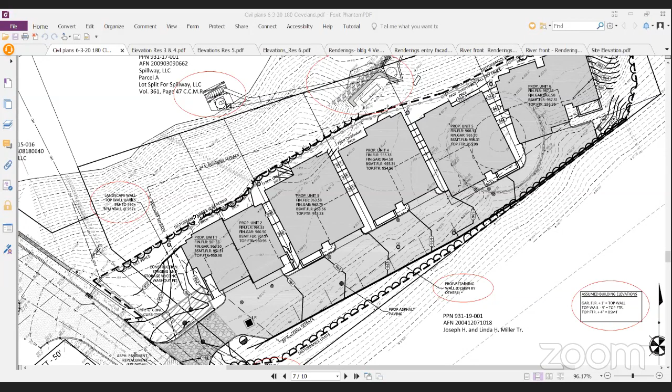Welcome everybody, good morning. Steve, I'll turn the floor over to you. This is for final review for 180 Cleveland Street.

The final review. I'm puzzled by that because we don't have a lot of information yet. Final review is when all the ducks are in order, and we're missing engineering, landscaping, final grading, and so forth, and the mystery brown structure that appeared at the last meeting. So I guess I'm puzzled why this is a final review.

Yeah, the applicant did ask for a final review, although their engineering is under review right now. It's not complete. They would wish to proceed with final ABR, and I told them we can submit it, but it's ultimately up to the ABR.

Well, I don't know, it's just the way, a vote type of thing. This is either you is or you ain't. Final is final. Well, I think maybe the relevant question would be, would there be anything we're not seeing that would have an impact on the architecture review board's opinion of the architecture of those houses?

And I guess it's probably what I'd be thinking about would be big changes to grading around the structures. As far as the structures themselves are concerned, certainly we can ask about certain details, but for the structures, it's a complete set. Harry says the grading's under review, and the site work, obviously the retaining walls and those elements, are so important.

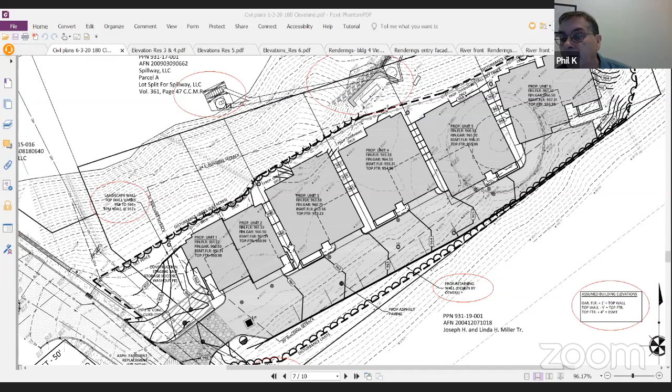It looks to me like the buildings, from the site plan that Harry has up here—the topography is dropping, I don't know, 6, 8, maybe 10 feet through the depth of the building. What happens when you get to the lower level of these buildings up against the steeper grade that runs to the river? Is that where the retaining wall is that we're talking about?

I can speak to the retaining wall a little bit. As far as the information on the retaining wall, we've had on the civil drawings that have been submitted—even with our preliminary applications—we've been showing top of wall and bottom of wall elevations as they work across the site, all the way back to our preliminary submittals.

We had an elevation, because it was asked for, of the retaining wall. We had that submitted along with our preliminary approvals. And yes, as part of this submittal, we also have information on the retaining wall included. So this is not in any way the first time we're seeing this. We know it's an important component, and it's been asked for from very early on, and we've made sure to include that.

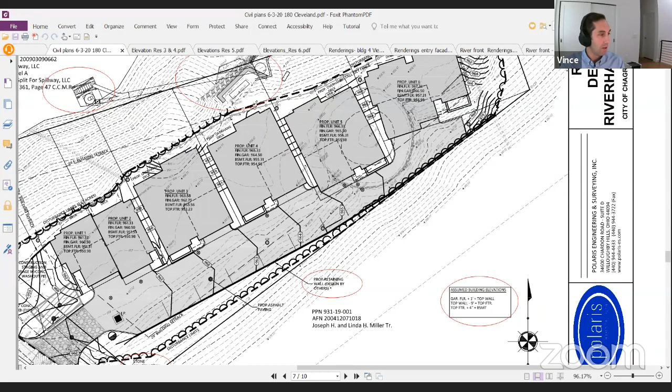To help clarify where the retaining wall is in the drawing that Harry has up, it's the heavier line towards the bottom of the sheet, starting over by Cleveland Street. You'll see a round circle with a line through it. If you move down from that... No, that's the property line. So if whoever's running the cursor could move up a little bit, towards where it says '20-foot building setback,' the bottom left-hand corner—there we go. So just up from that, you'll see a black heavy line. That's the retaining wall there.

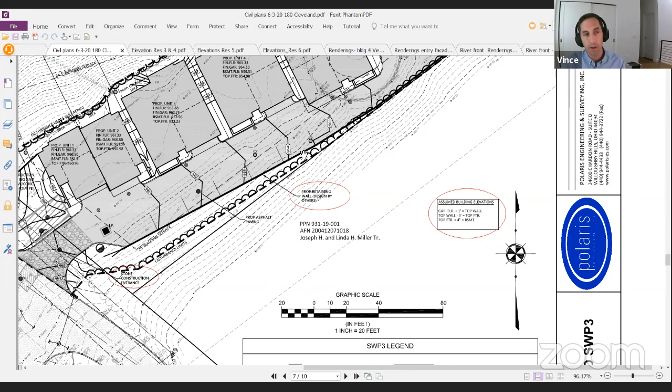So it's for this portion—it comes down, and then as we work our way back towards the property, it jogs a little bit and continues back. So this is retaining the hillside above this property. It is, it is. And the buildings themselves are designed in a way that...

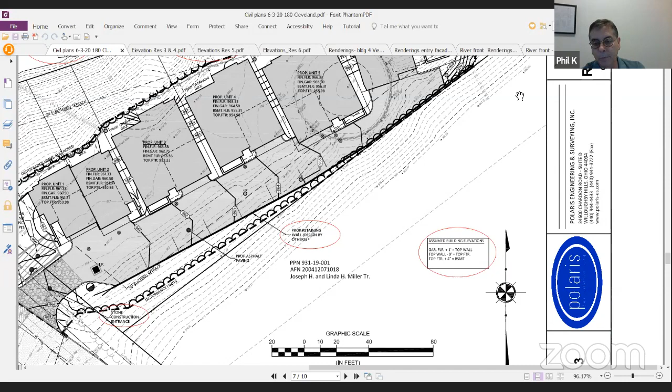...any load that the buildings provide will not add to any kind of stress on the hillside below the building. That's accurate, that's absolutely right. So the houses themselves are bearing on the rock beneath the hillside. So the buildings are not adding any weight to the toe of the slope.

Our geotechnical engineer has been working with Tim Lannon's office to make sure that everything he would want to see to satisfy the hillside permit in terms of borings is being done. We're actually doing some additional borings tomorrow to do a stability study through one section. We've agreed with his office what he wants to see for the hillside permit, so we have more borings being done tomorrow to satisfy that. But the houses themselves are not adding any weight to the slope.

So the retaining wall is just to bench back the area for our driveway, starting in the back corner of the property by where you see unit 6, which is at its tallest point there.

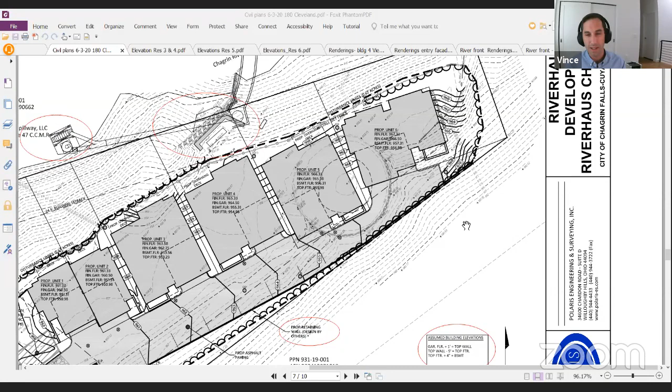And I think above grade, Mike, feel free to correct me if I'm wrong, I think we're showing maybe 6 feet of wall on that side roughly. Yeah, so at its far end, roughly 6 foot, and maybe 2 foot at the Cleveland Street end, sloping up.

We're going to be hiding most of what you see now, that current clarifier tank structure that's there, that's coming out. So the most you'll see of this wall from our side, from the driveway, is 6 foot from asphalt to top of wall, and then it tapers down as you work back towards Cleveland Street. We're not actually retaining that much of the hillside since the houses have basements under and we're bringing the grade up around them. It's not a real big cut into the hillside.

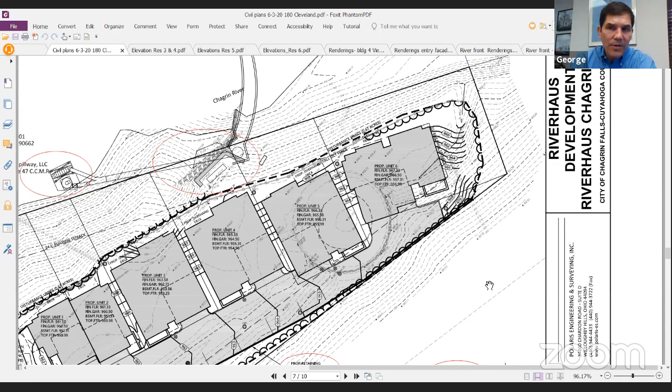Right. So as I look at this, I'm just helping explain this and help everyone understand it. The first couple houses, the floor levels jump up about 1.5 feet, and then between buildings 3, 4, 5, and 6, they step up 1 foot. So those lines on the driveway you see are 1 foot increments. The driveway rises across the 5 buildings about 6 feet, as you said, gradually sloping up. The buildings step up a little bit, and that probably helps keep the embankment above the driveway, that retaining wall, down to 6 feet at the top of the site, right?

Yeah George, thank you for that, that's exactly right. When this project was originally looked at, there was discussion that the houses would be much lower than where they're at, and this wall would be much larger. As the grading developed and we worked this out, we found what we consider to be a good balance between allowing some daylight in those basements and minimizing the amount of exposure on that retaining wall. It was really a balance between those two things to keep the retaining wall to a minimum.

And all the grading is finalized, so it's not like anything's really changing here. You've got some engineering calculations that are still being reviewed.

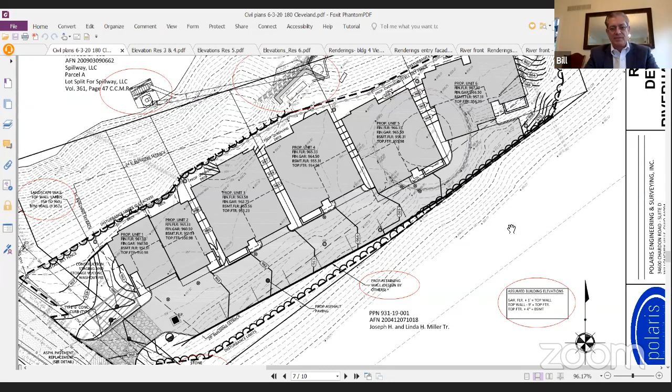As far as the draining and grading, our civil engineer has of course handled all of that, and we've had to be very careful with that to make sure we're not draining off down over the slope because of the 5-foot setback from the hillside and the requirement that we're not allowed to touch any of the vegetation. Beyond that, there's very little that we can do on the riverside over there. So we do involve landscape architects on our projects when we feel there's a need, and from our perspective, there's just very little area here to require that.

Now we'll work with, obviously there's going to be landscaping here, and we'll work with the homeowners and the contractors to do some sort of design build on that. But there's just very little landscaping on the site.

I can't flip to the page that has the elevation or the rendering. I don't remember seeing any retaining wall. Until last meeting, we had a glimpse of a little brown wall that wasn't concrete, way down at the end. And now it runs tapering almost to the first unit. What does that look like? Why haven't I seen it?

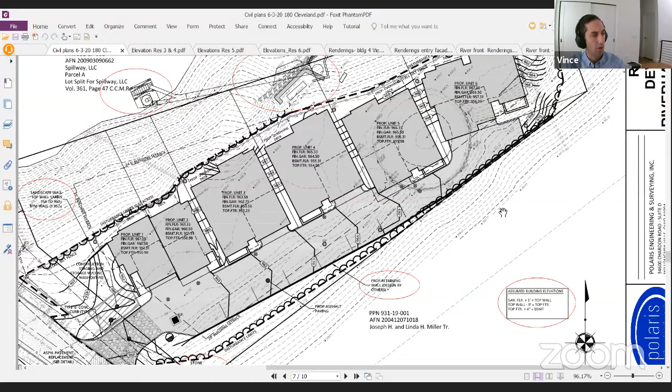I believe you're referring to what's circled in red right now in the upper left-hand corner. There's a concrete structure originally from the dam works that is being reflected in our renderings that goes down into the river. It's not part of our work. It's an existing structure, beyond that 5-foot setback we're not allowed to touch or do anything with. So we're just trying to represent that the best we can in the renderings.

But it's what's on this drawing. It's showing some mechanicals on top of it, which are no longer there. But there is a concrete pad that was part of the paper mill's operations that goes down into the river. That's still on site there. But once again, that's beyond our property line actually, and the area we're allowed to touch. And you can go look at it now, Steve. It's there. So it's not going to get any worse, and they're not allowed to make it any better.

Actually, I was looking for it, and it looked different than it looked in the rendering, so I wasn't thinking I was finding it. Now I know what you're talking about. Thank you. Sure. Yeah, we do our best with the renderings to represent what's on site, but landscaping or the current vegetation, for instance, is very hard -- obviously it's much taller than what's actually shown on our renderings.

If you're looking from the riverside, really the first floor and a half of these buildings are going to be obscured by the vegetation. Now we understand that's seasonal and will certainly change in the wintertime. But I would just remind everyone that what we're seeing in that rendering, as you come up Cleveland Street or from the river, is not really the perspective you're ever going to have on these, due to the amount of vegetation on the hillside.

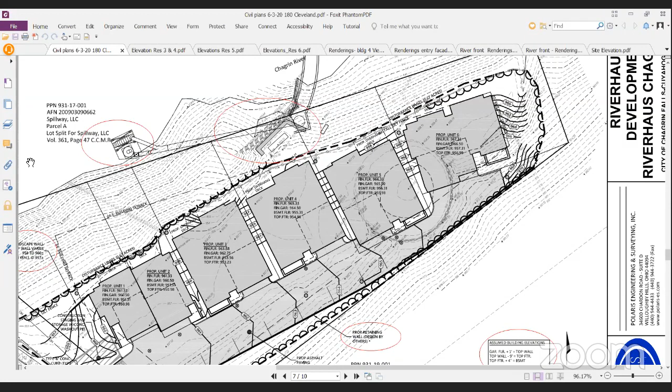I'm not sure what cultured stone -- where? On the one elevation, we'll go to it here in a minute. It's a structure out in the river by the dam, and it looks like it's got cultured stone attached to it. Okay, I mean, that stuff's not even on our property line. Yeah, that's even beyond. Don't show it on your drawings then.

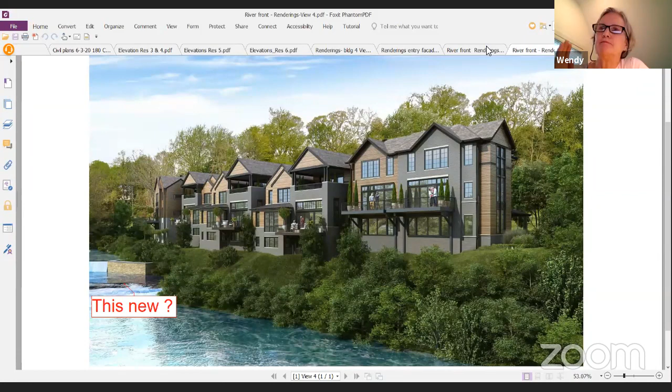Right, right. Carrie, I also don't know if it's possible to pull up a drawing that shows the entry to the property and shows that retaining wall Vince is referring to, continuing back across the property, down the driveway across the property. That's an important sight line from Cleveland Street. And if we're going to do a final approval, I want to make sure that we see that rendering, that sight line, before we do an approval. Yeah.

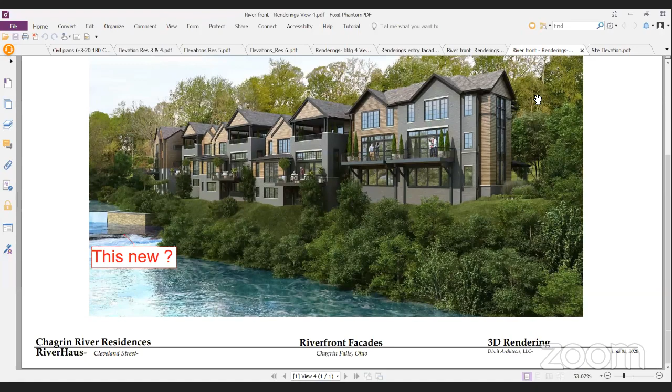We do have an elevation of the wall, if Carrie could bring that up. It's a separate page. Do you have anything beyond the site elevation there? I have everything you submitted to me, plus renderings.

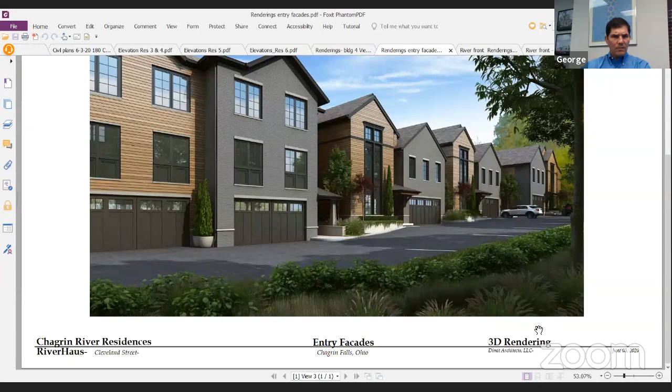Yeah, that angle, but with the retaining wall. Right, you just don't see it. It's not an accurate sight line because as you're coming up the street, across the bridge, up the street, your eye goes that direction, and I would just like to see that.

I understand that. We have an entry facade rendered from the backside, and from this perspective, you wouldn't see the wall, not only because it's at its shortest elevation there, but we're looking from the hillside, so it'd be obscured by the landscaping.

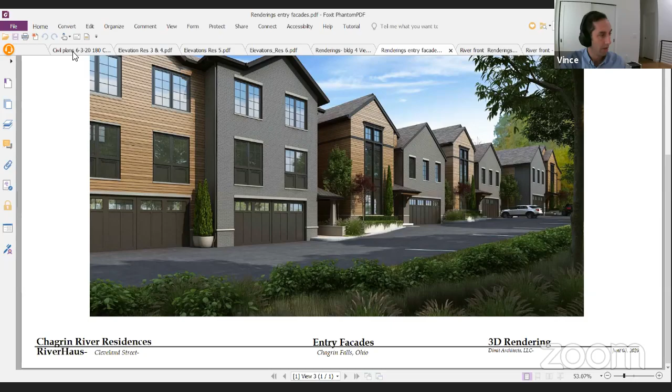That's why I think we need to see that too. I don't know if I have it open on my screen if someone wants to share mine, or I can — it's in our submittal, it's RH 1 through 6 wall elevation is the document, and it's the elevations at the retaining wall, so whether you want to open it or share it with me.

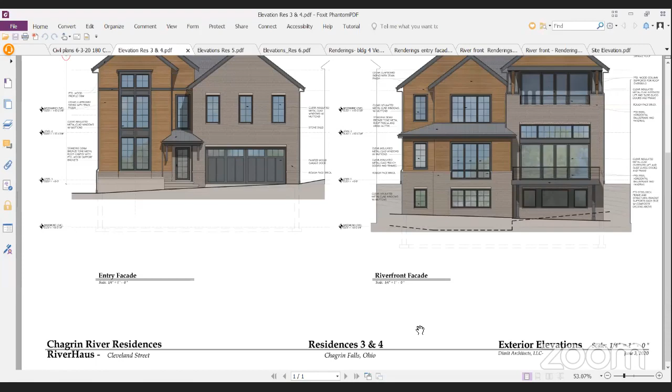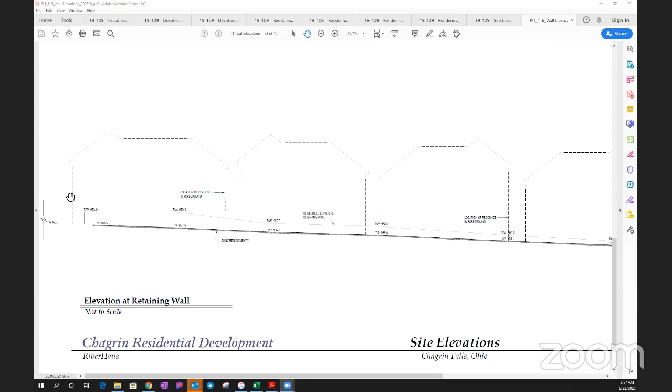Okay, so I'm going to zoom in here a little bit. This sheet was just to help understand the retaining wall elevations. So we can see here, we're looking at the outline of residence. You guys can see my cursor okay? Yes.

Okay, so this is the outline of residence 6, the farthest back from Cleveland Street, and you can see here we're giving top of wall elevations and top of pavement elevations. We can see how, if you're looking through the buildings, the wall drops down and continues down as it works back towards Cleveland Street, ending about halfway through the first building. This is where we're looking at 962 to 959, so 2 foot 6 inches at this point here, and that doesn't go all the way up to the street.

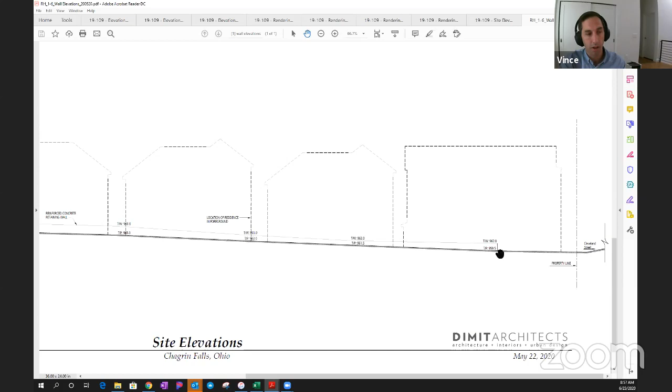Now I understand it's not a color rendering, but this is a very detailed elevation so you understand how much of this wall you're going to see. Could you zoom in a little and then scroll? Certainly. The diagonal lines seem to go away. There we go, that's better.

And while I'll kind of scroll through slowly here as we're talking — to your point, George, with the retaining wall, if we need to talk about putting some color in the concrete or a brick face or something like that on the wall, we can certainly talk through that. I'd like to ideally make sure we all understand where on the site the retaining wall is, how tall it is, and really where you're going to see it.

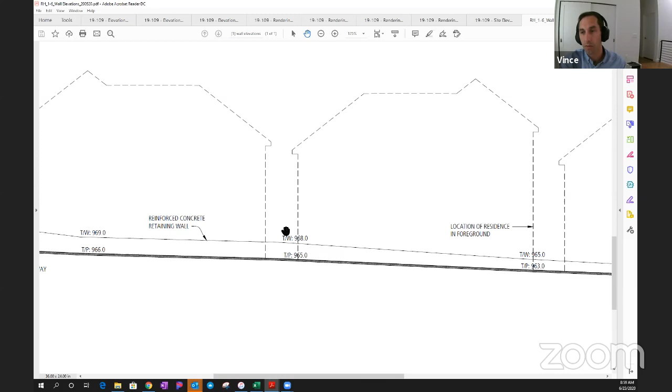So, from coming up Cleveland Street and from across the river, you're not going to see this wall whatsoever. You only have these little gaps between the buildings, and this will be fully covered by landscaping. There's very few areas from outside the site that you're going to have any kind of perspective on this wall. This is really something that the homeowners are going to be looking at.

As I come across here, you can see this is where it gets very short. So even if you're talking about driving up Cleveland Street, at this point it's only 2 feet tall, and you're coming at it from an angle coming uphill, and Cleveland Street's at a little higher elevation here. So, of course, I understand the aesthetics of the wall are important, but the reality is it's really something the residents are going to be seeing. It's not a public facing element. You're not going to have a perspective on it from outside the site.

It's a poured concrete wall, but if we wanted to talk about putting some color in the concrete or a brick form on it or something like that, that's something we could look at.

I'm not sure of the process here, where we're at. I'd certainly like to get into talking about the architecture. If the retaining wall is something that we need a little more information on, I don't know the process for approval on the architecture. If we need to submit additional information on the materiality of the retaining wall, we'd be happy to do that.

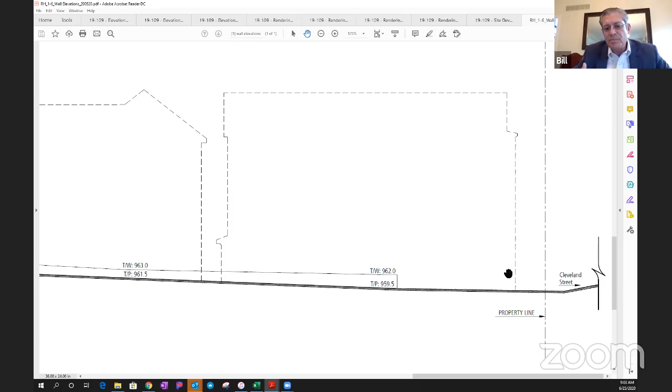It's not like piecemeal. I agree with Bill. I think we need to see the plan as a whole. We've been burned in the past when we've looked at things piecemeal. I'm thinking of condos on West Orange Street. Presenting things in pieces, I'm very hesitant about, but this is the first time I've seen this kind of presentation on the retaining wall. I would like to see more.

Ms. Nail, I apologize, but we're not submitting anything piecemeal. This is a pretty comprehensive submittal that covers everything that's been asked of us. And this is not the first time we've submitted this retaining wall drawing. I apologize if you haven't seen it, but we were asked for this prior to our preliminary review.

Harry has, as he said, been pointing out for a while that this retaining wall was something everyone needed to see. We made a point of including elevations for it on our civil drawings that were included at a preliminary stage. We've included this elevation prior. We don't see, from our perspective, that we're submitting anything piecemeal.

There'd be no further drawings developed for this unless we were asked to, to George's point, to look at the coloring of the wall or something like that. But this is a fairly comprehensive submittal for 6 single-family homes.

Mr. Childs, to your point, at the end of the wall it's 2 feet tall. The grading is shown on the grading plan. It's going to get feathered off at that point, and the grading will come up and wrap around that wall and cover the edge of the wall. I think we can all picture what the grading is going to do around that. It's on our grading plan, and we know how that would be graded back.

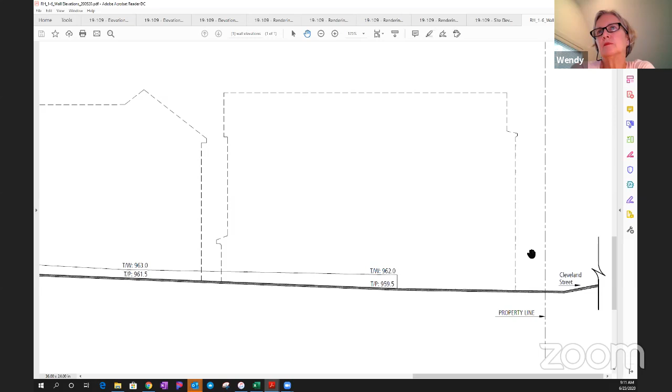Shall we move to the buildings potentially? Yes, do you want me to continue sharing some of the renderings? Yeah, go ahead Vince. Why don't you drive the drawings.

Okay, let me scroll through here and find a rendering to start our conversation off of. Here's one. I'm going to move this to a different screen. I have my notes here. We wanted to make sure that we very clearly went through the meeting minutes from last meeting and addressed every individual item that was asked of us at preliminary. If you would allow me, I can go through this list directly off of the meeting minutes based on all of your comments.

There was a comment, I think Mr. Childs noticed there was a conflict in the roof ridges not intersecting on the same plane. That was just something in the drawings getting resolved - the construction drawings hadn't been developed at that point, so these weren't meeting on the same point. I think Mr. Childs, you caught that at the last meeting. We addressed that as the construction drawing developed, and that's been fixed. Now this ridge intersects this ridge at the same elevation.

The front entry bracket sizes were discussed at the last meeting, and we have lengthened those. Let me see if you have a better perspective here. Please note, this is the rendering we looked at before - this is just a rendering. This is what you saw last time, and you can see the bracket terminates about here. Now on our actual construction drawings and elevations, we've brought them down even further to enlarge them per the comments from the last meeting. We've made them more substantial as requested.

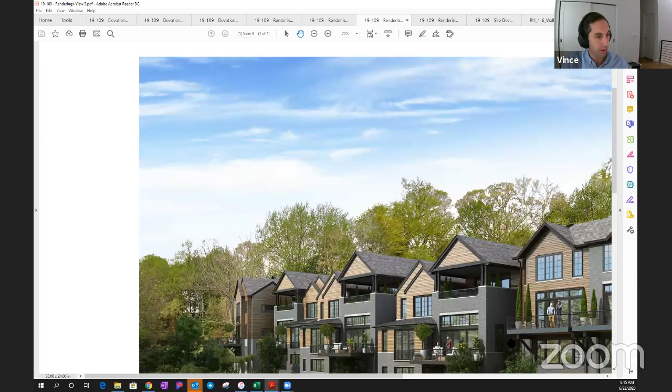There's also a question about a window - I'm going right off our meeting minutes, so bear with me. There was a question about this window here needing to be a little bit taller to align with the head height of the sliding door. That's been addressed here as well.

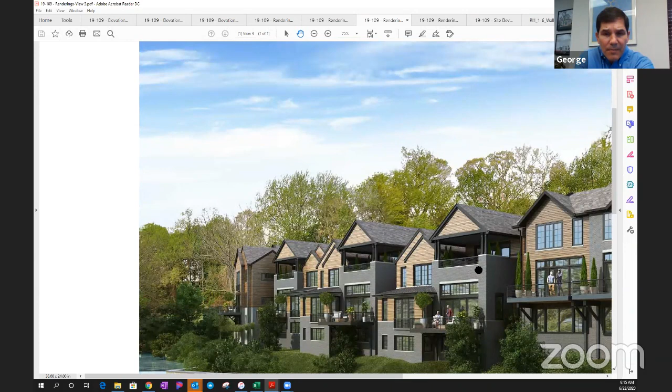Can I ask if that rendering shows the placement of the buildings accurately? I expect it does, but nothing moved - no buildings went back or forward. No, nothing with the footprint or setback of these buildings has changed since the first time we've been in front of you.

That was part of our zoning approval with Rob, and we have not changed anything. We've maintained our 5-foot setback, and the site plan has not changed. I only asked because they look tighter, in fact, in the plan drawings than they do in these elevations. I'm still fine with that window.

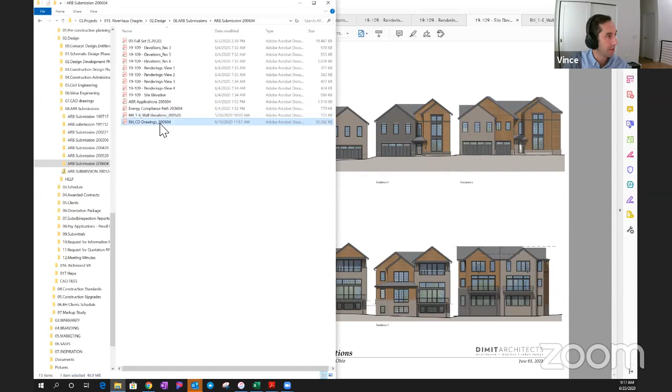Yeah, I'm happy to pull them up, I have the CDs here. I'm happy to open them, it's just a large set and might take me a minute to navigate. It's opening now, that's good.

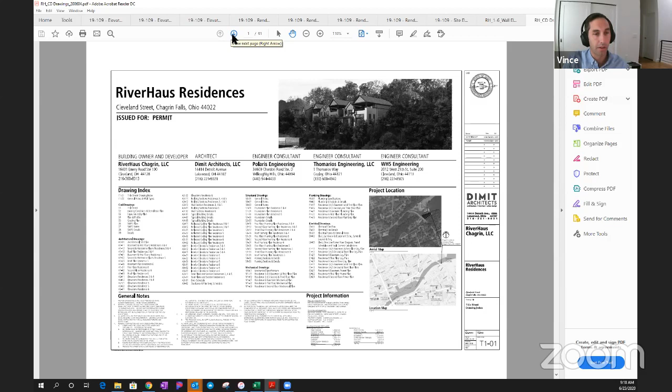There's a couple details that I wanted to take a look at. Certainly, they're opening now - it's going to be, okay, about 90 pages. So I can try to find whatever details you'd like to see on the construction set, just let me know and I'll open to it.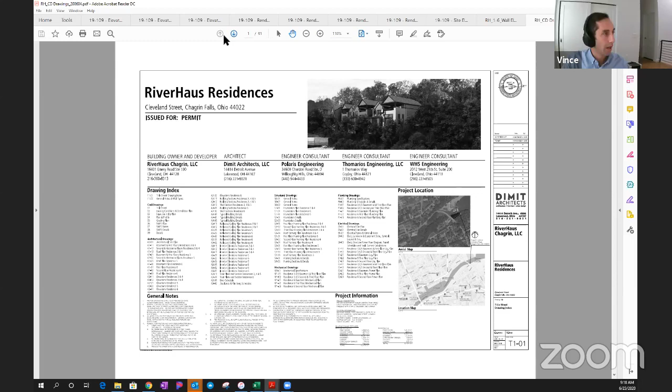Well, I'm not trying to jump there - I know you're trying to show the end elevation, so let's look at that. Okay, sure, let me find it. A2 something, right? Yeah. Here we go.

Our elevations - residence 6, that's the Cleveland Street side. Here we go, yep. So these windows were added since the last meeting. There's a fireplace here on this wall, so these will flank that fireplace on either side.

I think those are attractive and effective.

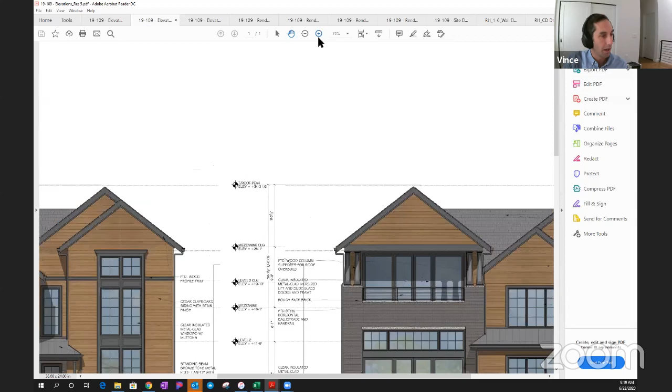So the list I just went through were our notes right off our last meeting minutes - I went back and watched the video from the last call, which was very helpful. We addressed, and I'm sorry, I skipped one: columns. There was discussion about these columns - we had one column, and it was requested we go to two columns at these corners, which we've done. I think that also shows up here, let me zoom in a bit. There are detailed dimensions on those columns within the drawings that you'd expect to see - A313 and I think A331.

Would you rather me go to the CDs? I think that's helpful, sure.

Okay, so there's a section through that porch. Let me zoom in. You're only seeing one column here because the other one's behind it. This section is one I was focusing on, and I was not critical of the column itself. I think that's successful—intuitively it's proportionate for a craftsman style column.

On the exterior side, you're showing a band that's an applied belly band that looks like it is a beam over the column. But in your sections, there's a discrepancy between this and a section for building 6. We're just seeing a flat ceiling there that runs out and touches that band.

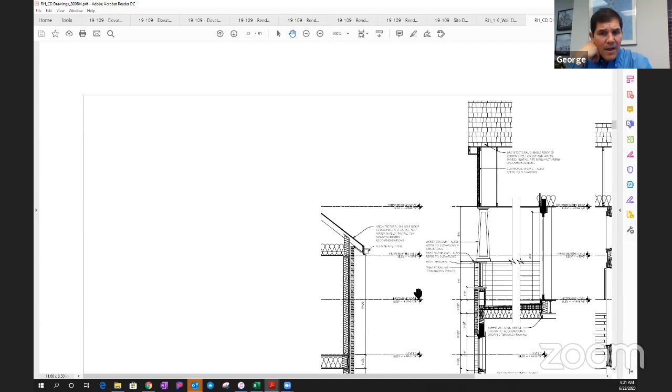I think it'd be important to actually raise the ceiling inside that space and have at least a 6, 7, or 8 inch height on the inside, so that you would actually have a beam over those columns. It's also hard to understand—I don't think I saw a description of the material of that ceiling. If you zoom in on the top of the column in another drawing, a section for building 6, you're actually showing something that's about 6 inches tall.

I think that whole ceiling will still work well with trusses, because in your other direction you're showing the truss as having a little vertical leg on the outside. I think you could pick that up and your trusses would still be a clean triangle, and you'd just have a beam expression which should relate to the width of the column, not just be a thin little thing.

Yeah, I certainly understand the note, and we can look at it, absolutely. Off the top of my head, you've kind of hit on this with the trusses. I know that truss line is carrying all the way out from inside the building, so if we have a raised heel possibly inside the building, there's something we can do with the heel height to achieve what you're asking.

But my only concern, and I'd ask for your opinion on this too, is obviously we have a guardrail height we have to meet here, and we only have 5 foot clear. My concern would be if we were to add a beam to this and drop this down any more. No, I mean raising the ceiling. Exactly, I think that's right.

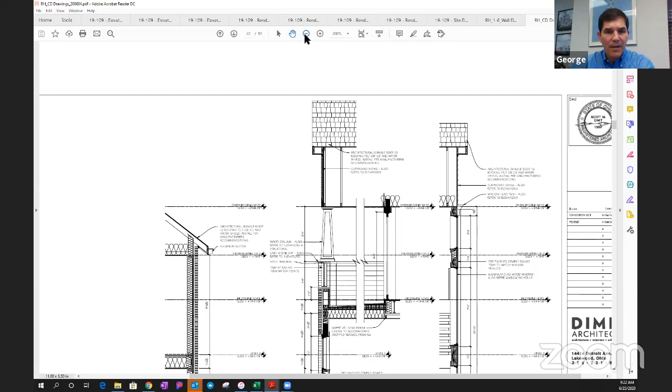You don't change the column height. Basically, you just—and you have another sheet further on, a section relating to building 6—it probably didn't get caught up, but I don't necessarily want to jump to that. But okay, you actually show that ceiling either with the column shorter or the ceiling higher than 8'6".

I think if you pop that bearing height up just for that area and use actual beams along the side and the front of that, you'll ultimately be more satisfied with the way it details out, and I think it will look more architecturally correct from the view from the river and for the people on the porch.

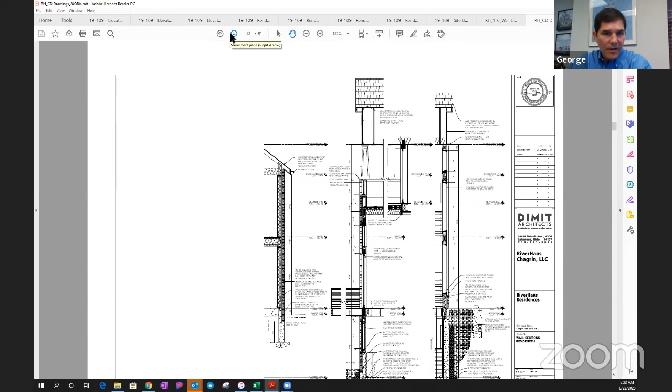I wanted to go into one other detail which I think is really important, and it doesn't seem consistent between the renderings, so I'm kind of ignoring the renderings on this. In this section, to the left of the one we were just looking at, we have a sloping soffit, which I believe is typical throughout the project. So the underside of your soffit slopes up to the brick, and it's not a little flat soffit at the eave—it's kind of a typical eave detail here.

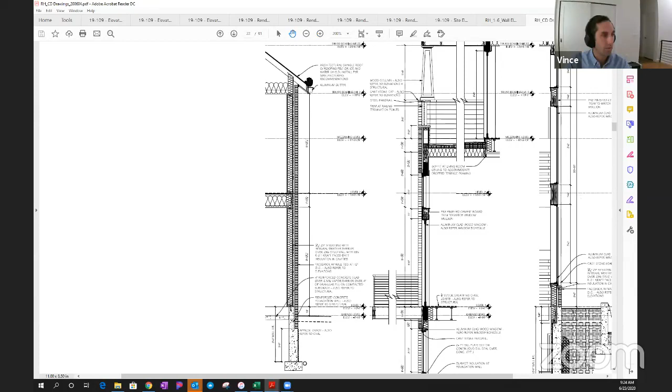Talking right here, yeah—let me zoom in a little bit more for you. That would be, for me, kind of an important preferred detail, because it leads to a clean eave line as it projects out, looks like this. It doesn't kind of pork chop at the end back to the building.

I think you've got a kind of a mix of what happens on the model, and I understand that—somebody's modeling it early on, and they're trying to figure out how to model it.

But I think that detail also allows for a beam expression on the side, and we're cutting through the front of that where the column is. As you run back from the column to the building, that gives you a face above the face of column running up to that sloping soffit. So this is your preference, what's shown here, but just be consistent with it.

Yeah, carry that through everywhere except maybe those little porch roofs. That's a good comment. I can't speak to every detail, but like you pointed out, if it's just a legacy item in the renderings and this is the intent throughout the building, we'll confirm that. And then you're speaking to the soffit, the underside of the eave, the soffit material, and the ceiling material on the porches.

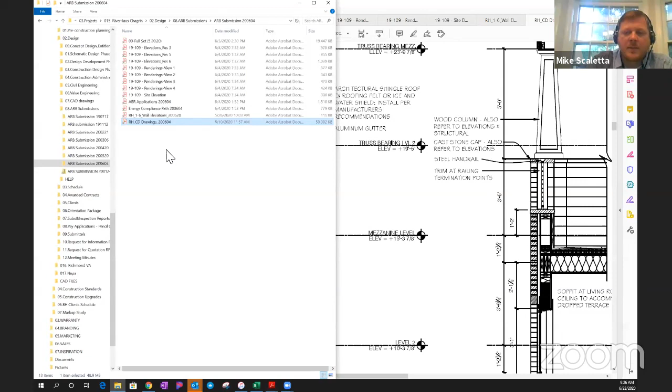Mike, do they have the PDF you created? We wanted to bring material samples over, but due to the virtual nature here, we prepared a PDF with manufacturers. We did do a material presentation, but I don't think we got as detailed as the soffit and porch ceiling, George, I'll be honest with you. So I may have to come back with that information. Mike, was that sent separately? Yeah, that was sent separately to Harry. Let me try to find it real quick and email it. We did do a material presentation that speaks to all the major components.

One of your eave sections shows clear cedar soffit board to match cladding. Yeah, that'd be great, if it's wood. I can tell you we're not using any vinyl products anywhere on the project, that I can confirm. And the one that would be a shame would be aluminum. So if you've got clear cedar soffits, that's exactly what I'd hope for. Or what about a composite alternate - not cedar, but something like KW - the material proposal actually shows a KWP composite cedar lap siding board, not natural cedar, and they have a soffit product that matches it.

We're looking for something a little lower maintenance for our homeowners than the work that comes along with keeping up clear cedar, and what that can look like if it's not well done. I'll open it in just one second when it comes through.

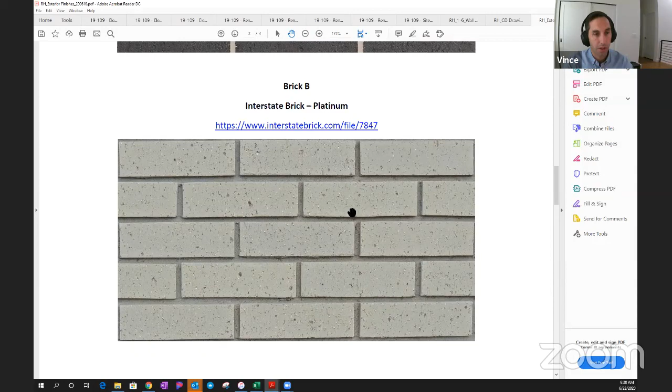We've got information that there's 2 tones of brick. This is the darker one, and this is the lighter one. There was a comment early on that there was a very white looking brick - this is not that. This is a gray, it's called platinum. We've got the file here. Sometimes the colors don't render out perfectly on the screen, but this is a gray brick.

Were you going to do that contrasting mortar, or is your mortar going to be more monolithic? That's a good question. I'd have to check with the architects on that. I think the intent would be for it to look more monolithic - this might be the only stock image we had, but if we look at our renderings, they reflect a more monolithic look on the brick. As far as what we could find off their website, this is how it was shown. They ask you to focus on the brick.

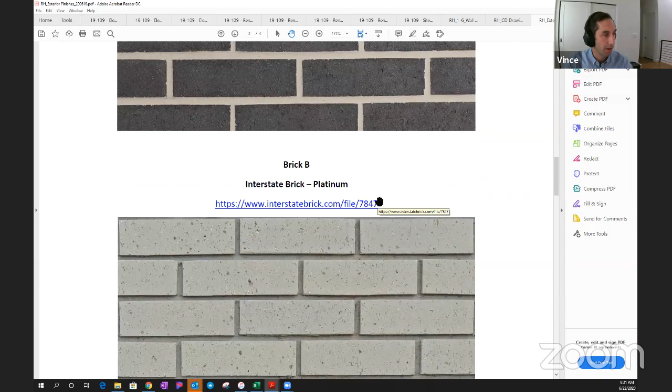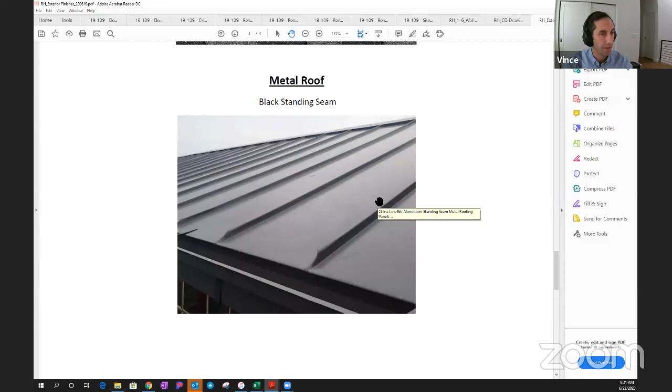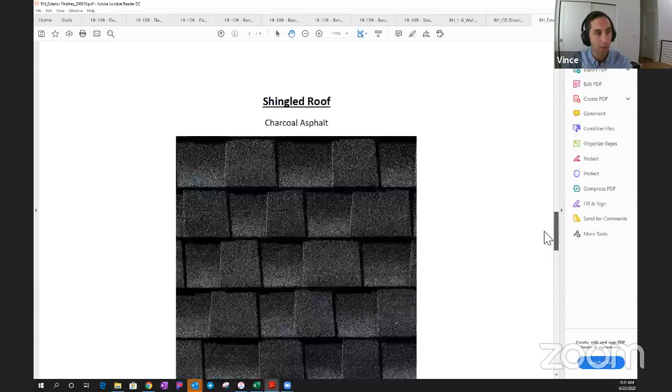Dimensional asphalt roof, where we have roof, we've got standing seam metal on those few areas. And this is actually one of our past projects, but this is a Pella window with the grids and everything, so this is what we refer back to if we start talking about materials at all. We do have physical samples for all these things, but due to the nature of these meetings, there wasn't a way to present that, so we put this together as an alternate.

What is the glass tint? We've had some issues lately in other projects with houses appearing to have dark glass. Yep, I certainly understand that. We're not adding any tint to the glass. They will have the low E coating from the manufacturer on it to help with UV transmittance into the house, but there is no additional tint beyond just the standard low E coating.

Is it a 272 or is it a 366? George, I don't know that off the top of my head, I can circle back to you. Mike, while we're talking, you might even be able to open - we have a proposal from Pella on that, if it's called out there I might be able to get you that information shortly. That's a follow-up item. 366 looks darker, 272 looks very familiar and is basically a typical low E.

I know Pella has 2 versions. They have something called their Sun Defense, which is a more aggressive low E coating, and then their standard. We have not requested that Sun Defense, it's the standard. So we'll try to pull it up while we're talking here.

Is there any other screens or drawings I can switch to besides the siding right now for anybody? This sample I'm looking at, is that one sample, because there's actually several different textures I'm looking at - is it just a mixture of textures? That's one sample to try to represent the variety you would see within this product. So there are 4 samples in front of me then? Nope, that's one, that's one product - you're just seeing some different grain variation across it. So when we install this on the buildings, you'll see a variety of grain texture just like this.

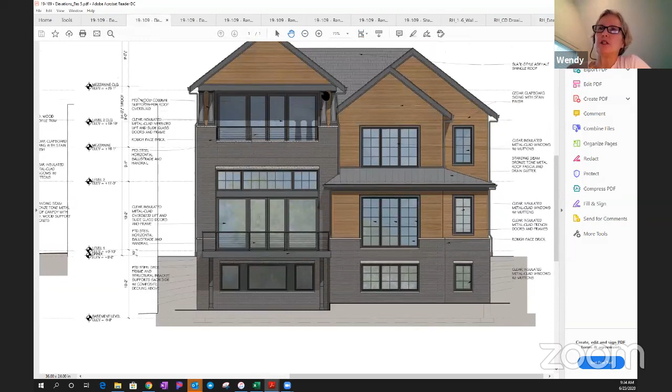Does the board want to go back to the elevations? Just so I'm clear, are we approving the first 2 units today or just the other 4? The other 4, Wendy.

I'm sorry, run that by me again. I thought we discussed approving the whole project, period. Yeah, that's the reference I was making earlier to the piecemeal approval of the presentation. But at a previous meeting, I think we agreed to preliminary approval of the other 4 units, and that the beginning 2 units could be presented at a later date for preliminary. I'm not sure where we were going on that for final. It was a holdback attached to that, as I recall.

Our intent is only to present residences 3 through 6. We're fully aware that we'll be bringing residences 1 and 2 back through as a complete submittal, both for preliminary and final, as a completely separate submittal. So we're not asking for any approvals related to the first 2 units today. We're just looking to discuss 3 through 6, and that's all that's part of this application. Now, of course, we have the one rendering that shows everything, and I still think it was important to try to present the site, but this submittal is only for 3 through 6.

It's important to me that you come back through with units 1 and 2 that now conform to the height restrictions, so we can see that the massing of them is... I considered it more successful, and I think the comments were primarily about the windows. I think we can talk about the same window issues here in buildings 3 through 6, but I would have been concerned about approving 3 through 6 if 1 and 2 hadn't gotten in terms of massing where they needed to be.

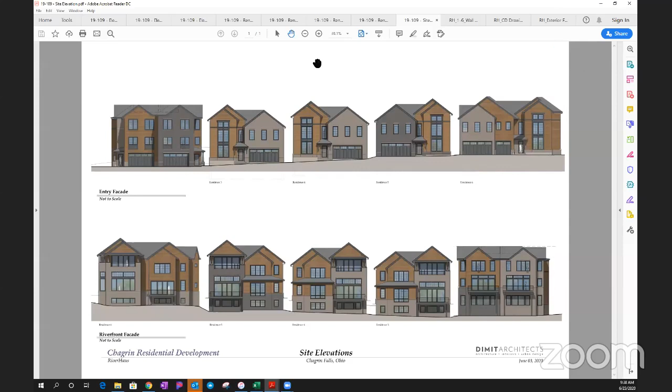So I see one significant change has been the lower level basement windows below the decks, where they've become smaller. I'm just looking for a little more consistency in the width of the separation of those windows. I've seen one triple that looked like it was mulled together as a group, and then there was one with a mull that was not too wide.

And then I think like these, which I'm looking at the bottom of the bottom group of elevations, middle three buildings, right? The windows underneath the deck, I guess I'd like grids in the two side ones, but then they're quite separated. Or to me, that's not really... it's not where the cursor is, it's to the left. Yeah, I'm sorry, I didn't move it, but I know what we're talking about here. Right, yeah, there.

So do you like the punched openings better that way than the one next to it on the left, George? I think so, and I'm interested in the comments of the board. I mean, I think those side openings should have grids, at least, possibly all three. I'm curious what the rest of the board thinks about that. But I think if you let the middle window vary, I know you have varying widths you're dealing with. You let the middle window vary and keep a consistent width between the windows. Obviously, the side windows are going to pick up the same proportion as many of the punched windows.

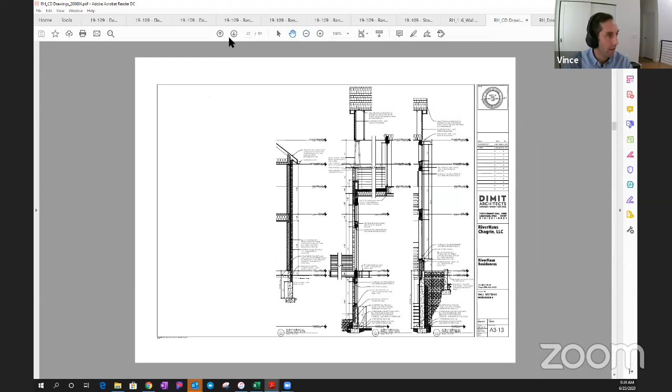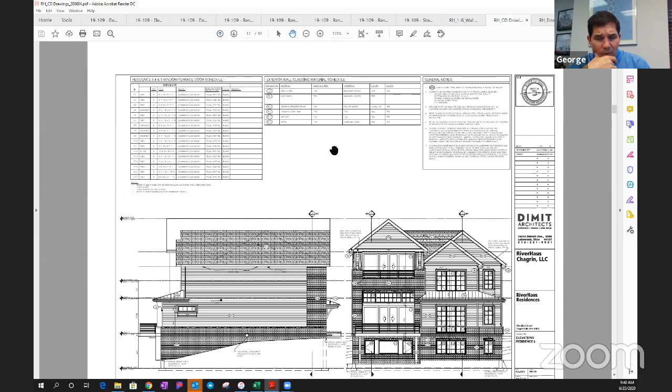Yeah, those are the two that I thought were residence 6, and different. So we're talking down here. I just want to make sure they were consistent between the color. So those ones, I would have an issue with those not being brick.

I think that's wide enough to be brick. So I think you either have brick coming between the windows, which is more like what you had in the rendering. So brick between the windows, I would consider acceptable.

Or if you go to the intermediate, so you've got a 6-inch, 7-inch wide mull between, and it's detailed with the window trim, that could be okay too, but I think they should be the same everywhere, building 6, building 4, 5, 3, 4. Certainly.

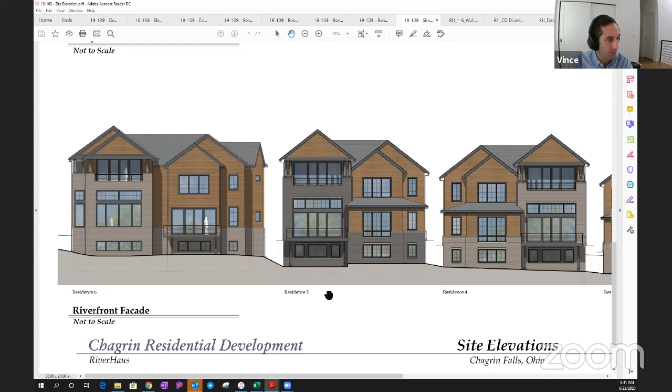So just to be clear on the comments - the arrangement of these windows is okay. We're talking about material between them and grids, or just the flanking windows? Right, and the width of the wall between them should be consistent. If you go down to 5 or 6 inches and it's just a mullion, then...

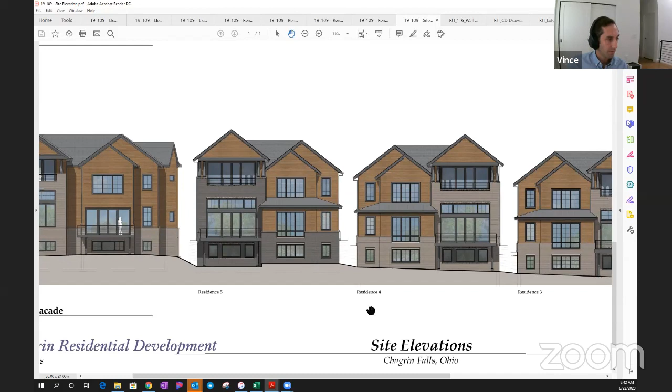I think the takeaway here is organizational composition of the subentity of the overall composition. What that means is if you look to the right, you have organization with the mullions and the windows, although that's matchy-match. To the left, if you just organize, try it with a sketch - show how the organization of the mullions, like starting with the transom, if that's A, the other two ends are B, do that in the middle section and continue on down. It'll feel better and look better overall.

Okay, I just want to make sure I'm understanding. I think we're pretty clear on the request here. Are we moving up now into these windows with that? Is there something you'd like to see here as well, or are you happy with this?

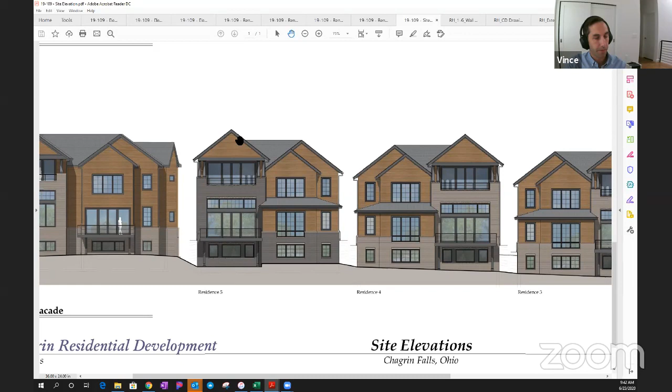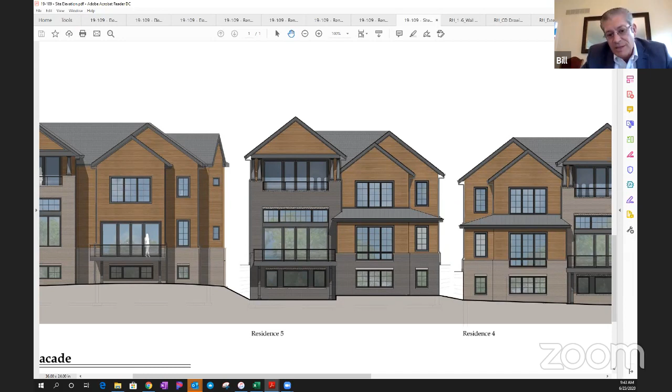From my perspective, on the middle section, if you have a transom that has the muntins in it and you have the two smaller transoms on each side, those mullions from an organizational standpoint should line up down below. They look like they miss, and from a visual standpoint, it doesn't really feel right. If you line those up, it'll feel a lot better. I don't know if you can do that from a function standpoint, but to the right - you see there's organizational composition, it'd be the same concept there too.

Okay, yeah, I understand now. We can absolutely look at it. We're not in any way opposed to it, if within the window manufacturer that's actually possible. We certainly understand the comment, and if Pella can make it work - we're currently looking at Pella and Marvin, but they're both comparable products in the lines we're looking at. If they can make it work, then yeah, we can certainly look at it. That's a pair of sliders there, so we just have to see if they can make that happen.

A pair of sliders where? These are sliding - this middle section are sliding doors here. Oh okay, same thing up here. By pair, you mean over the top of each other? A pair, I mean two active sliders - this is a sliding panel and this is a sliding panel that meet in the middle, so we can have a larger clear area for the homeowners to open up to the deck. They slide out over the fixed windows to the left and right. Yeah, that's right.

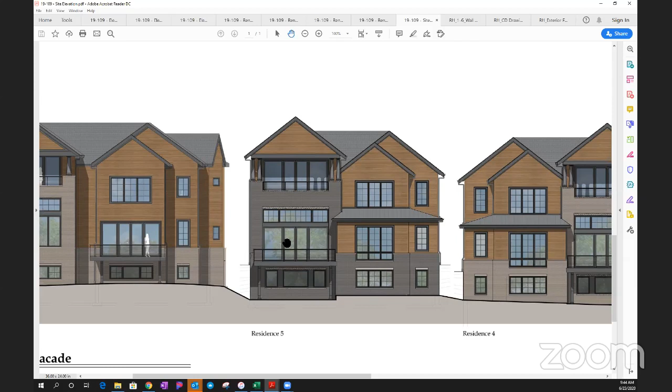Yeah, it looks like they could get bigger. From Bill's standpoint, his comment - can you make the transom lights align? Is that what you're saying, Bill? Or make the doors align? Make the doors align. Yeah, we certainly have no objection whatsoever to that if it works, as long as the window manufacturer says it's doable. We get it, I think it's a good comment - it's just a question of functionality within the limits of the manufacturer.

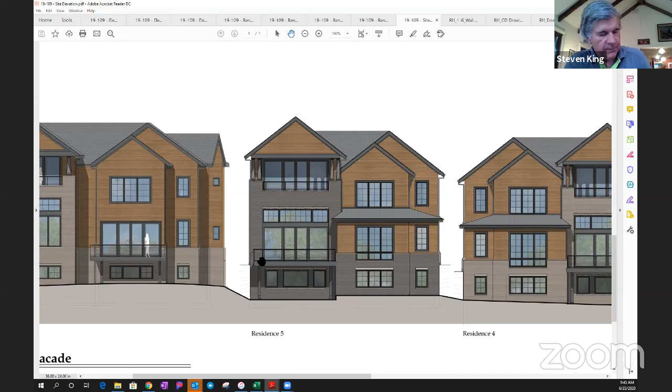Can you point out in a rendering the building that will receive the gray brick we looked at earlier. On the screen we're looking at, this would be the dark brick, the charcoal, and this would be flanked on either side by the gray. I'm looking for the rendering. Got it, the other side.

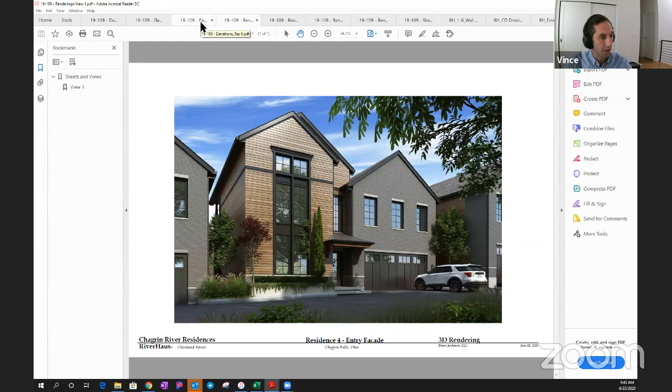Let me see if I can... In the renderings, the coloring all looks similar because they are just a light gray and a dark gray, so I'm trying to find the best way to present that. Let me back off here for a second and get my bearings. Sorry, I've got a lot of stuff open here.

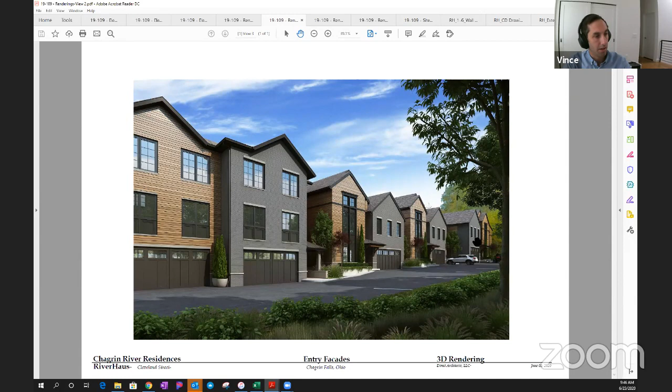Well, I appreciate your help. Okay, so I can... all right, looking, I'll go back to the rendering. I know you want to see it. So just so I remember, we've got dark, light, dark, light. So if we go back to here, dark. This would be the dark brick, light, and then dark as we work our way back.

Does that help? Yes, the other side, the riverside. Sure, yes sir. So again, these two would be light here, dark gray down here.

And then units 1 and 2 would be one light gray color, or would you vary those on 1 and 2? You know, I don't... I mean, it's shown here. I don't want to tell you the wrong thing on 1 and 2 since they're still in the early stages. Okay.

I like the muted look. Yeah, we know that originally we had showed you quite a bit of contrast in the brick, some dark and some really light, and that certainly wasn't well received. We understood it, so we still have two bricks, but they're not too far apart in color, so it's not as stark of a difference as you transition between the different units.

Mortar is about 20% of the surface of a wall, so the monolithic look will be important, and it'd be nice not to have it any lighter. Okay.

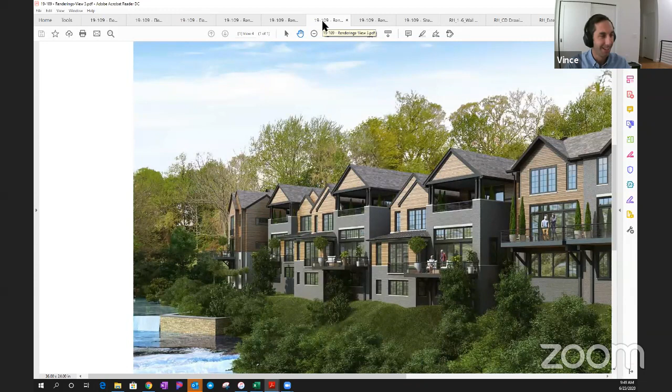What's your thought? So for instance, in this picture— oh sorry, George, I'll get back to it. There we go. So for instance, in this picture, you wouldn't have all that glass together down below the balcony to the very right there underneath it. It's pulling down and pulling in a little bit and separating. I think that's the significant change.

I saw, what's your thought, Steve? I know, Wendy, I know you... isn't that unit one? Aren't those units 1 and 2? Yeah, that's 1 and 2 over here. Probably hasn't been changed. I'm just trying to say that's kind of was the change that was made. Right, and I think that's what we're probably waiting for your feedback on.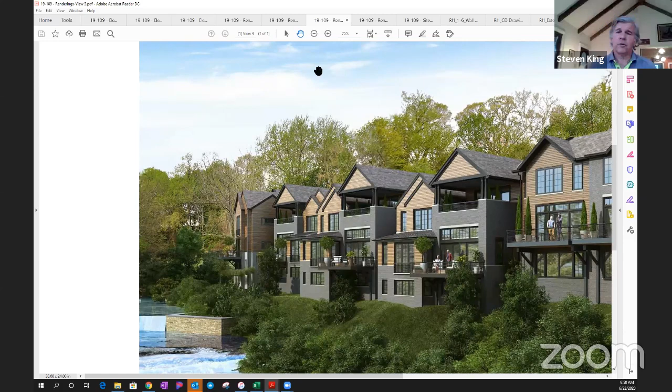1 and 2 are the main concerns with glass because the elevation is higher and more exposed and more in line with the road. You come down that road, you drive at the buildings and then by the buildings.

It's a very dark surround with the woods and so forth from this side for sure, a lot of glass. I've been preaching that since day number one. In some cases, I'm not sure why it's necessary. You want to sell these, you want the view, that's what's going to sell these. I understand that. But there's no view from the staircase, so that's not necessary. That's for another day.

In terms of, I wish I could see the contrast of the new gray brick versus this gray brick, because you don't want them to look like a row house, all the same. Well, they're different in many ways, so I don't think it's going to look like a row house, all the same. So variations are fine.

Why it needs to be lighter, I'm not sure, and I'm having trouble understanding what light brick is going to look like in those two units. This rendering may represent more the lighter color than the darker, or it might be even in the middle. I'm not sure about that. Is there a way to know that?

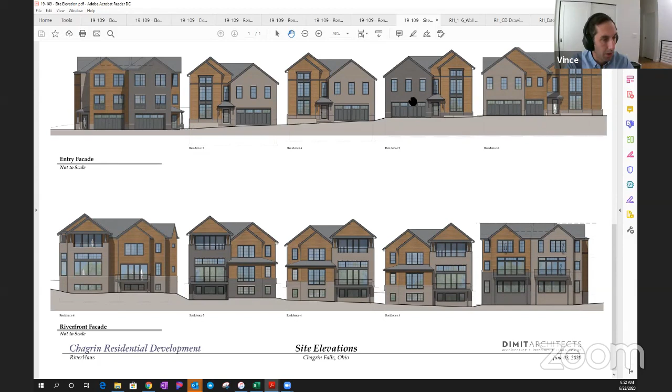Okay, you're saying that color is most like what? Well, I'm just saying like this image that I have open would probably be the best representation to help show some variation between them. The renderings aren't doing a great job of showing the color variation between the two bricks, but this color 2D elevation does. I guess was my comment.

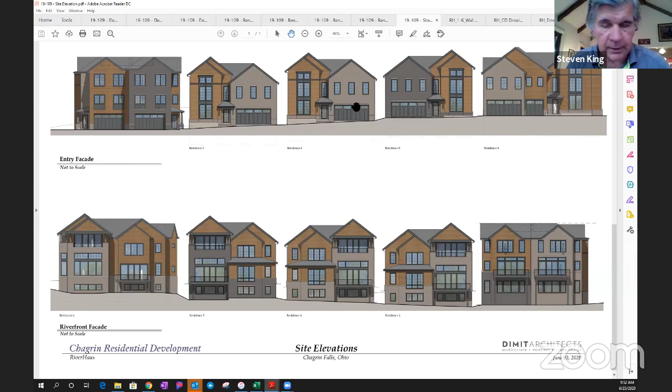I know in the past, could we project, see your lighter? Could we see your current gray color sample slide that you had a while back, please? Here we go. Zoom out a little bit so you can get them both on one screen.

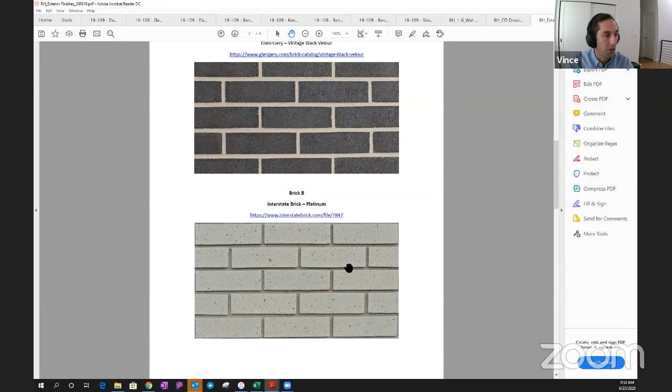We walked every row with Brian Williams over there of all their samples from every manufacturer. They either just looked so close there was almost no point in doing it, it'd be such a subtle difference. In past projects, we've done some that are real close, and when you step back, you can't even see the difference, but the architects know that there's a difference. We've had jobs where we've done the same color in a wire cut versus a smooth, thinking that subtle of a detail would add some contrast, and it just bled together.

We did, I mean, I don't want to tell you we'll go back and look at it and not have it, because we actually did put a lot of effort into the grays here.

Which joint are you going to use, the top one or the bottom one? Joint wise, it would be the top one, not raked back. That's part of what makes these look not quite the same, not quite as compatible. You've got the raked joints with a matching mortar, and then you've got the tool joint but flush with such a contrasting mortar.

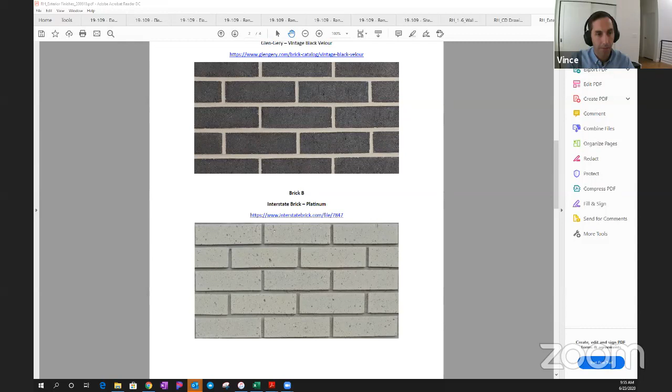That's, and sorry, these are just stock images, the boards wouldn't show it that way. These are just the best images we could find online. We might have some more current renderings for you to look at that show the brick a little better, if you'd like to see that, I can probably find it in a second here.

It's hard in the renderings though to actually portray what George is talking about, the level of contrast. This is a really high level of contrast. And I might throw out the suggestion of not doing the contrast, of just sticking with one color throughout.

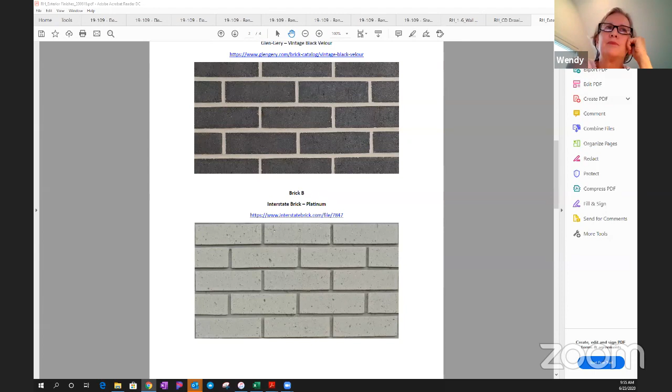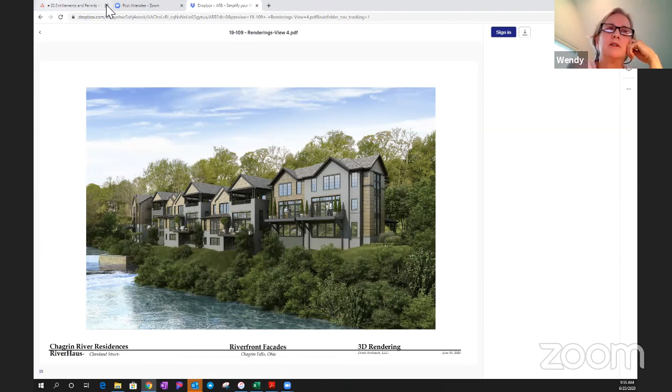Because that platinum is going to pop, especially right next to that very dark, they're calling it almost a vintage black brick, that dark charcoal gray brick. That is going to make it pop even more. This rendering we're looking at right now might be more closer to the platinum.

This is new, I just opened this. So this is a view we've seen a minute ago, but that helps to see. So once again, we're not really looking over here, but we do have a light and a dark, and then this is the platinum and this is the dark down here.

So that is the brick you're proposing? Yeah, this is the most current. Looks like it has a matching mortar. Yeah. You're going to do brick samples on site, like little mini walls?

Honestly, I haven't gotten that far. Typically these selections are done pretty far in advance off of our sample boards, and we commit to them at that point. On a larger project, it's kind of hard to react that fast on site, and depending on lead times on material, you know, it's a lot of brick. I wouldn't want to tell you we could do that, just depending on lead times of the material. We're pretty committed once we select it normally.

I'd comment that we've done renderings all over the country, and renderings never look like what it actually looks like, color wise and everything. I've tried a million different people, and what George suggested is doing site mock-ups, actually putting the brick in and putting some siding up there to really see what it's going to look like. I've never found a rendering - you can get close, but it really never looks like what it's going to be.

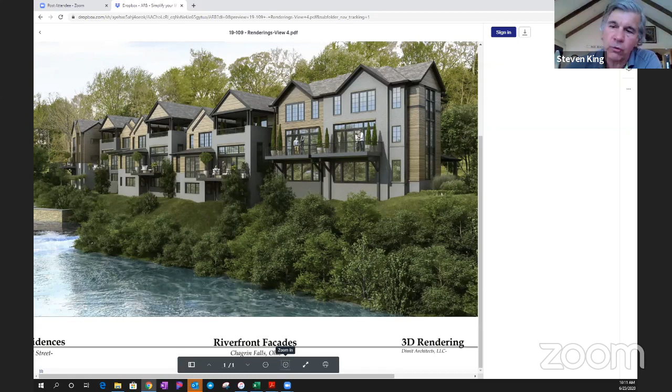When you look at a brick and you look at the mortar that's between the brick on the sample, and then you look at the mortar over here, it's not the same. That's why people go to the trouble to do a mock-up. You're in a big hurry to do it your way, is what I'm hearing.

I don't know how to respond to that. I'm sorry, Mr. King. We're offering to bring in all the physical samples that you need. A mock-up is not something that's required of every project that's in front of you. I understand that some people do it.

For what we're looking at here -- excuse me? When asked, they do it, yeah. And not everybody is asked, I guess, is my point. And the brick makes up roughly 50% of each one of these houses. It's four houses, and it's a pretty simple brick and brick joint detail.

And I feel like the colors in the mortar are quite easily interpreted from the samples that we bring in. We're not trying to match anything existing. That's the only reason I'm, for lack of a better term, pushing back a little bit, because I feel like all the information you need to understand what it's going to look like is within the samples and the mortar.

What I would propose is, if we go the route of having you bring in the samples, it may take longer if we get there and decide we need a mock-up on site. So in order to expedite and keep things moving along, a mock-up would actually keep things moving faster.

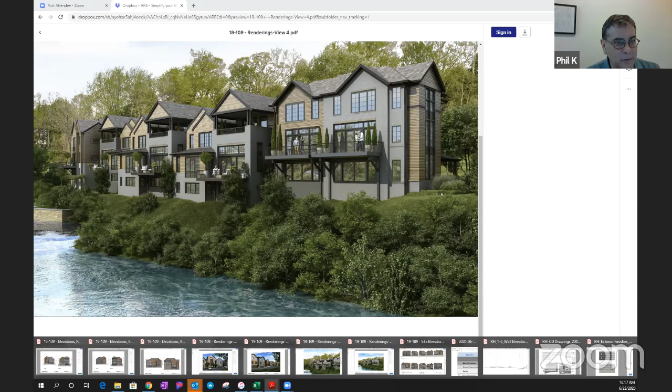There is no detail that I can find that shows a section through that sloped soffit and how that sloped soffit, like a detail around the corner from these, at the edge of the roof line where the gutters would run. You mean through that porch? An eave detail at the porch? Yeah, there's 2 different details for 2 different structures showing it through, we'll call it the outside face where the railing is, the gable end with the rake detail, but not the eave detail. Exactly, the gutter edge is not detailed.

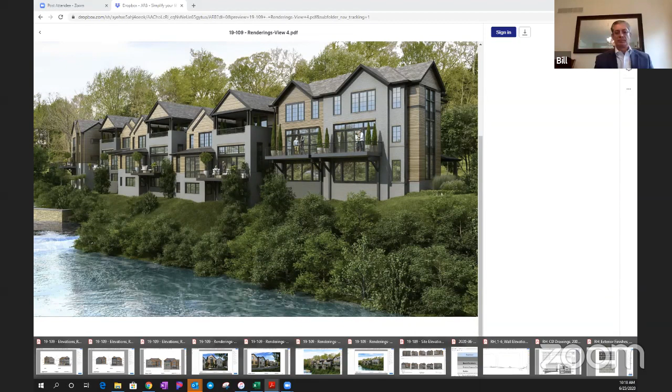How that, I mean, you've got to have a beam in there, and I don't know how, because that's supporting, those columns are supporting the roof. Are you following me, Vince? I am, I'm sorry, I'm emailing behind the scenes with Dimit's team. They're on the call, listening.

Just trying to confirm that because I don't want to speak out of turn on it. They are agreeing that there should be a slight beam at the ceiling. Yeah, and they certainly agree with your comment. I'm doing like 10 things at once here, trying to get this information for you. So there should be a slight beam like you're mentioning there. If you look at the section in the Residence 6, that section showing a beam is what's throwing me off, I don't understand why in the one case the trusses seem, the bottom corner of the truss seems to be higher than.

Right, so yeah, we're in agreement. We're in agreement that there needs to be a beam there, and there's some resolution for that area that needs to be done. We'd be happy to show you a better section of what you need to see to understand that. Certainly, and I think the one that wasn't caught up was the one on 332.

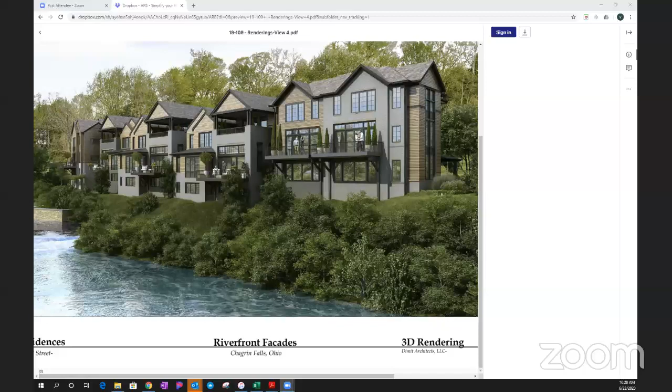That's Bill, if I can say on the plan review, it was picked up that they need to supply us with engineered shop drawings of the roof trusses. Yeah, well, Bill, I agree with you, but this is more than the roof truss, because there's some sort of beam that I don't see. I don't know how it's detailed.

And then when you look at that Residence 6 section, the beam that is shown there is shown too wide. It's actually matching up with the outer edge of that column shaft instead of the column capital instead of the shaft, I guess. And I think that's all true. Just to put it in perspective, I think that's an easy follow-up item. Yes, and that's a condition on approval, not a revise and resubmit type. I agree, I agree.

Yeah, that's a good catch. We're clear on what we need to show there. So, great—anyone want to make a motion?

How many conditions are we looking at here? The bricks, we've beaten to death. Brick, retaining wall, brick, retaining wall, brick, beam at the porches to be shown both at the eave condition and the rake condition. The organizational composition of the window grids, mullions, and transom. I would just say consistency there.

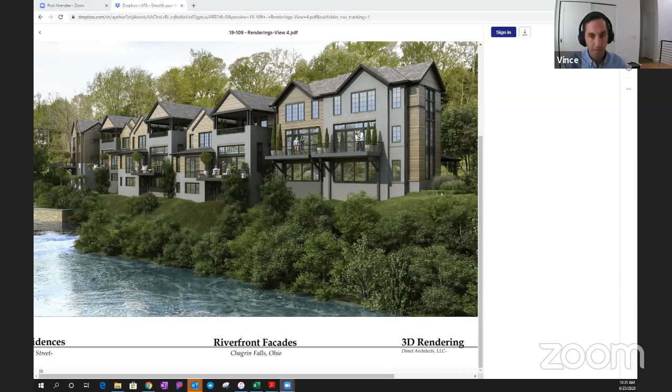That concludes the agenda. Is there anybody who wants to speak? If there are any members of the public who'd like to comment, please use the raise your hand function. I have no hands raised. It appears that the public has no comments. Okay, thank you, that concludes your agenda.

All righty, that was easy, huh? Thanks, everybody. Thank you. We're all set then, huh? Thank you. Let's have it every week. All right, see you, have a good weekend. You too, bye.